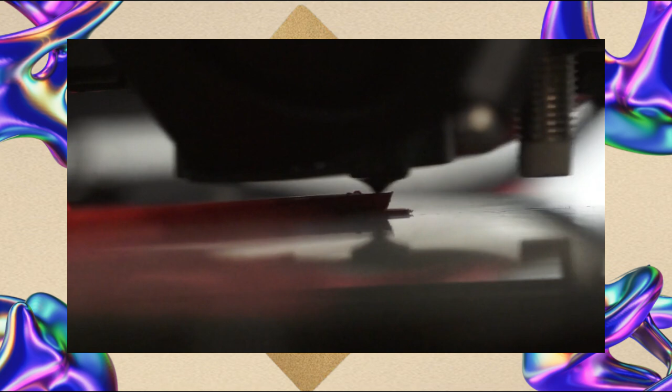This first project tackles that exact problem with a creative twist. We'll be using the power of 3D printing to design and build a custom adapter, turning that incompatible mirror into a perfect fit. Stay tuned to see this problem turn into a printed project.

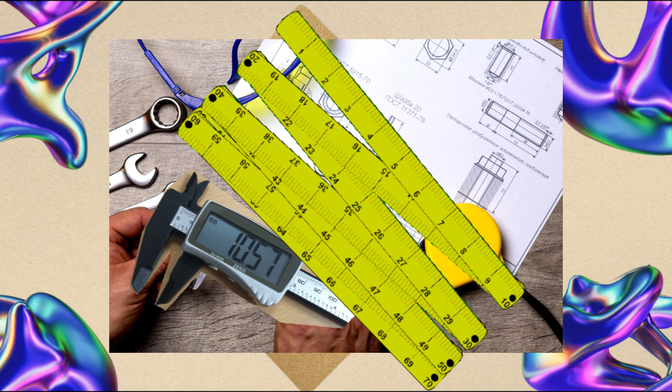Taking measurements. Before we jump into the exciting world of 3D design, let's tackle the first crucial step: measurements. We need the exact dimensions, so grab a ruler or some calipers. Digital ones offer great precision.

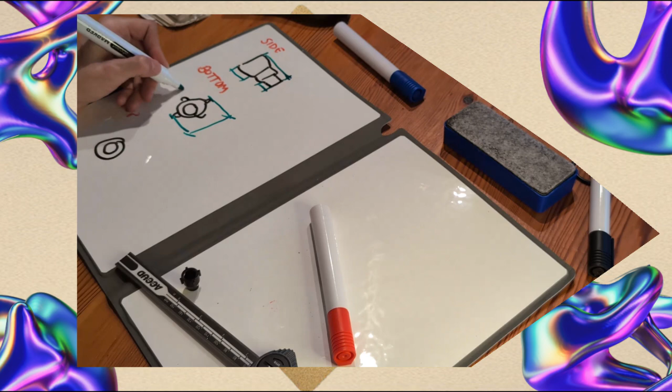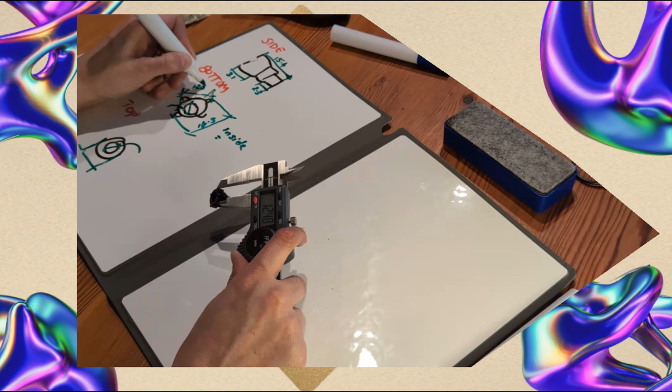We'll need the diameter of your handlebars at the mounting point, the diameter of the mounting hole on your mirror, and the dimensions of the connector. Don't forget to jot down any unique shapes or features on either piece, as these details might influence our design. With these measurements in hand, we'll be ready to create a 3D model that seamlessly connects your mirror to your handlebars.

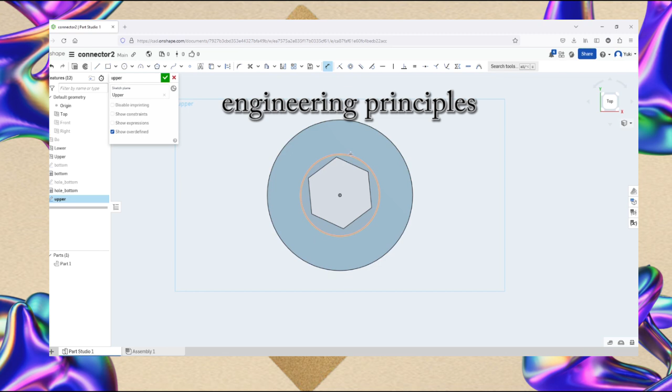Onshape is a parametric CAD, computer-aided design, program. This means you define your design using parameters, like the handlebar diameter, instead of manipulating individual points in 3D space. Why use Onshape? This focus on precise measurements and engineering principles might be more suitable. This makes it easier to make changes later on, and it's free to use.

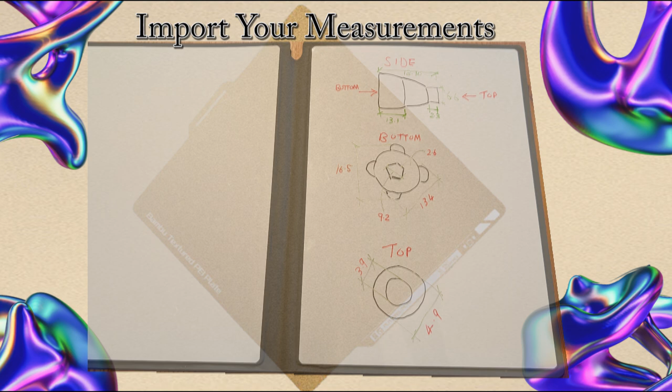All right, folks, it's time to unleash your inner designer and create a solution with Onshape. Here's a step-by-step guide. Step 1. Fire up Onshape and create a new document. This is your blank canvas where the magic happens. Step 2. Import your measurements. We finally get to use those meticulous measurements you took.

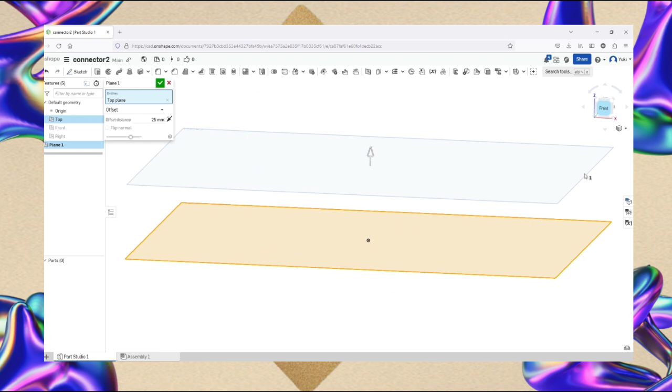However, before we jump in, Onshape needs a little preparation. Think of Onshape as a drafting board, but in 3D. To define your design, we need a flat surface to work on, kind of like a sheet of paper. These flat surfaces in Onshape are called planes. We'll need to create a sketch on one of these planes to begin.

The good news is, Onshape allows you to directly set the dimensions of your design elements within the sketch. This makes modifications super easy later on, which is why we'll be using parameters. Step 3. Set up the parameters. Instead of manually creating specific shapes with exact sizes, we'll define variables called parameters. These parameters will hold the actual measurement values you took, like for the handlebar connector diameter and the hole diameter.

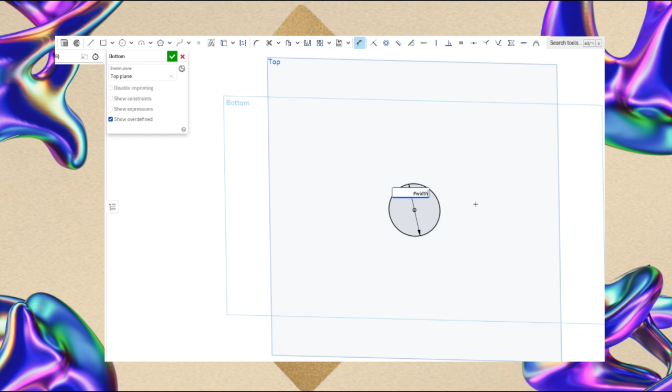Then, when you use these parameters within your sketch, Onshape automatically adjusts the size based on the values you entered. This way, if you want the connector to be slightly wider, you simply change the value in the #width parameter, and Onshape updates the entire model for you. No need to painstakingly redraw everything. So, let's get those parameters set up and ready to use.

Step 4. Building the connector. Let's get to work on the core component of your adapter, the connector. Here's a breakdown of the steps. Base for connector. Create a new sketch on the top plane and rename it to bottom or something unique to your design. Use the circle tool to draw a circle representing the base that fits into the adapter of your handlebars.

Remember those diameter measurements? This is where they come in. Once you're happy with the circle, use the Extrude tool and select the upper plane as the ending point. This will transform the circle into a solid cylinder, forming the base of the connector, creating the hole.

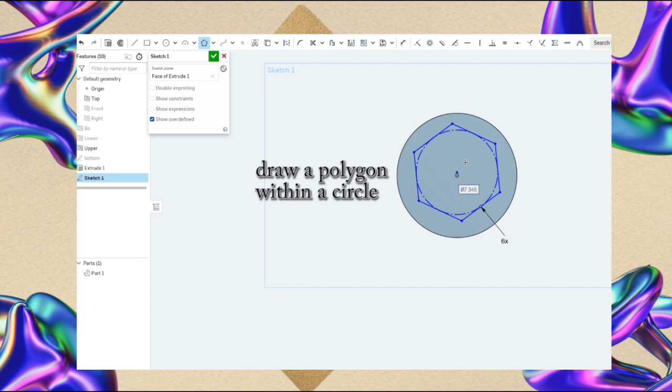Flip to the bottom face of the cylinder, the one we just extruded. Create a new sketch on this face using the Inscribed Polygon tool. This tool allows you to draw a polygon within a circle, defining the shape of the hole. The number of sides you choose will determine the shape, 6 for a hexagon. This will define the shape of the hole in the base so the screw will fit.

Once you have the desired polygon shape, use the Extrude tool again. This will remove the material within the polygon, creating a clean hole for the screw to pass through. Don't forget to rename the sketch for clarity. The middle of the connector.

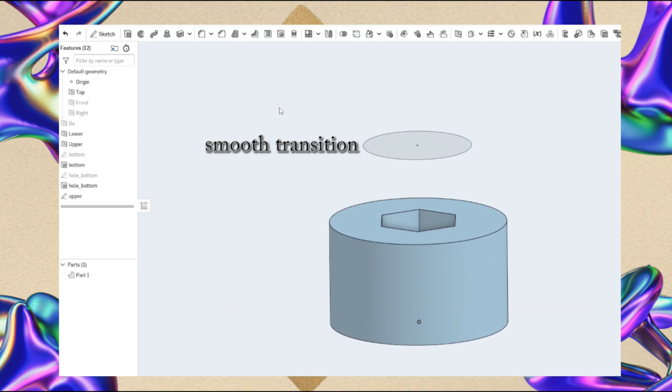Use the trusty circle tool once more to draw a circle representing the middle section of the connector. This circle will connect the top and bottom parts. Now comes the magic, the Loft tool. This powerful tool allows you to create a smooth transition between two or more profiles. In our case, the top and bottom circles.

Select the two relevant sketches and define the direction of the loft. Onshape will generate a smooth solid form connecting your base and middle section.

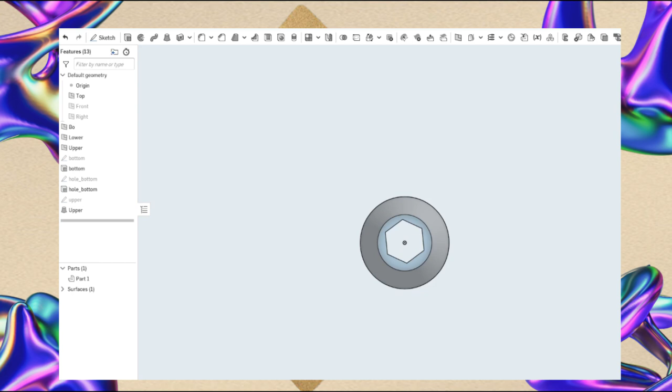The top of the connector. Create another sketch on a suitable plane. Use the circle tool once more to draw the outer circle representing the top of the connector. Draw another circle inside the first one, creating a donut-like shape. This inner circle will define the opening.

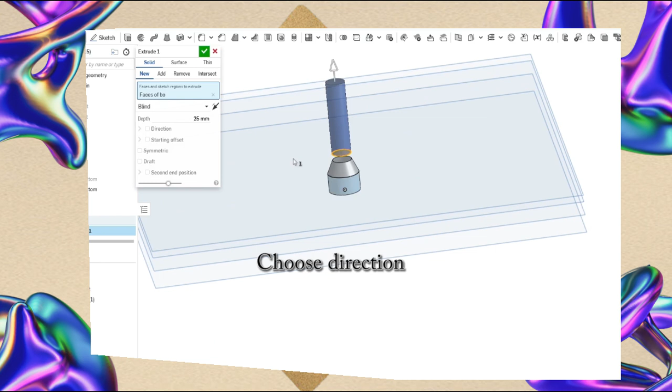Once you have the desired shape, use the Extrude tool to create a solid form from the sketch. Choose the appropriate direction to ensure it connects seamlessly with the middle section we created earlier. Flexibility is key. You can add parameters later. Learning about them while building the model can be a good way to experiment.

Here's how to incorporate parameters for easier future adjustments. Identify the dimensions you want to control, for example, the width of the connector. Head over to the Parameters section, create separate parameters for each dimension, and assign the actual measurement values you took

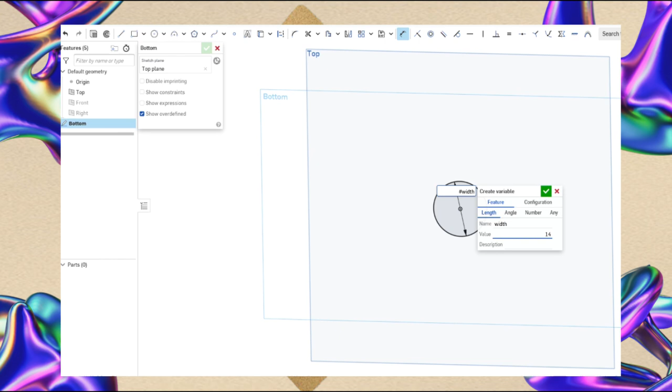earlier. The magic happens with a symbol, the hashtag. By using the hashtag symbol with the name of the parameter, example hashtag width, you can reference it within your sketch dimensions.

So go back to your section representing the connector base. Replace the fixed size you entered earlier with a reference to the corresponding parameter. This ensures a perfect fit based on your actual measurement. This gives you ultimate flexibility in refining your design.

Building the fin to ensure snug fit. The fin is a crucial element for a secure fit. Create a new sketch on a suitable plane. Consider the placement of the fin and choose a plane that aligns with your design goals.

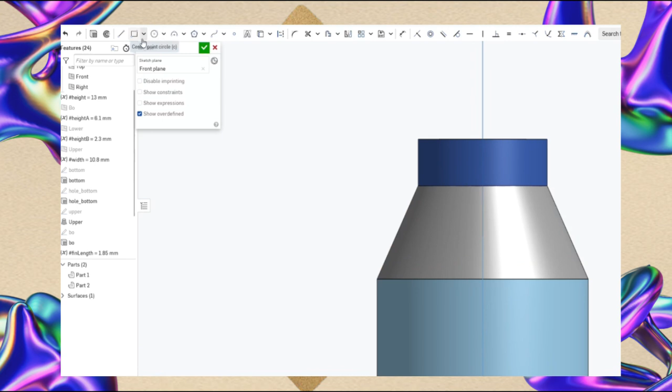Use the trusty rectangle tool to define the basic shape of the fin. Now let's define the exact size of the fin. Add dimensions for both the height and width of the rectangle. But instead of fixed values, this time assign a parameter for each dimension. This allows you to easily adjust them later if needed.

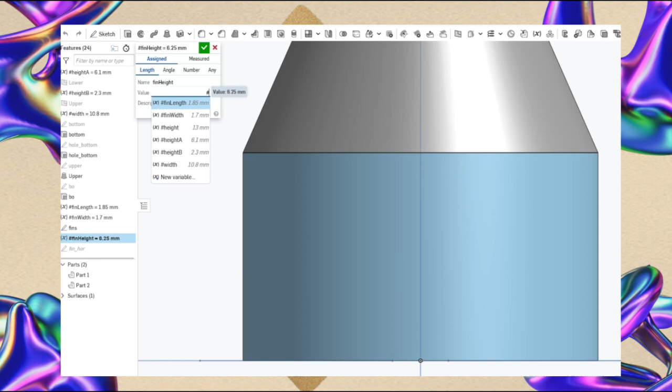Use the Extrude tool to create a solid form from the sketch. Set the depth of the extrusion to match your desired fin size. To ensure the fin sits correctly, you might need to adjust the offset value in the extrude settings. This essentially moves the starting point of the extrusion left or right from the chosen plane.

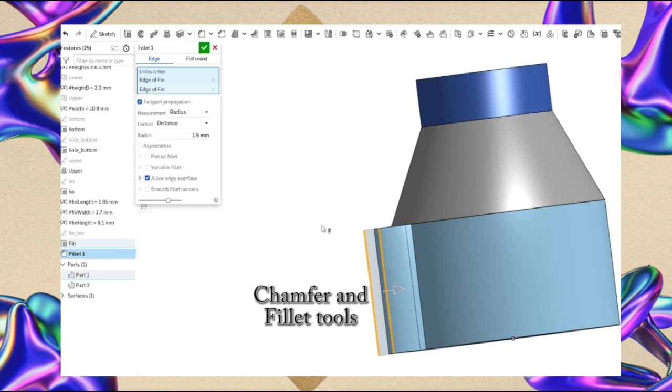Finally, use the chamfer and fillet tools to refine the edges and corners of the fins for a smoother and more finished look.

Adding multiple fins. The beauty of 3D printing is the ability to customize for functionality. In this case, let's add multiple fins to your adapter for an extra secure fit.

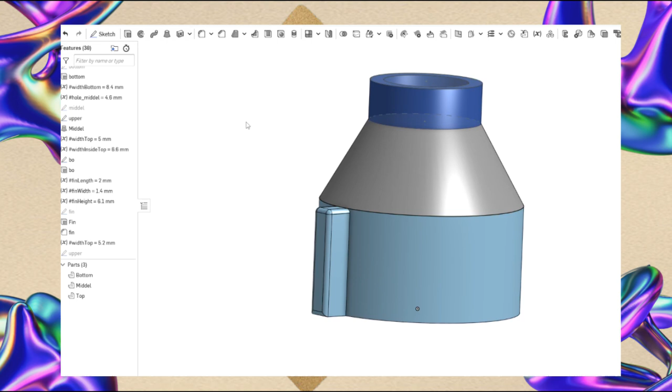Onshape offers a fantastic tool called Circular Pattern that allows you to easily replicate features around a central axis. This is perfect for creating our multiple fins. We need to tell Onshape which element to pattern, to copy, and around what axis it should rotate.

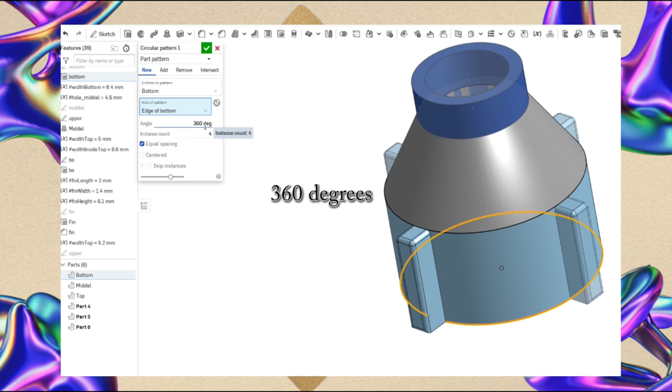We want the fins to completely encircle the base, so set the angle to 360 degrees. This tells Onshape to rotate the copied fin a full circle. For the number of fins, set the instance count to 4 and equal spacing. This ensures each fin is evenly distributed around the base.

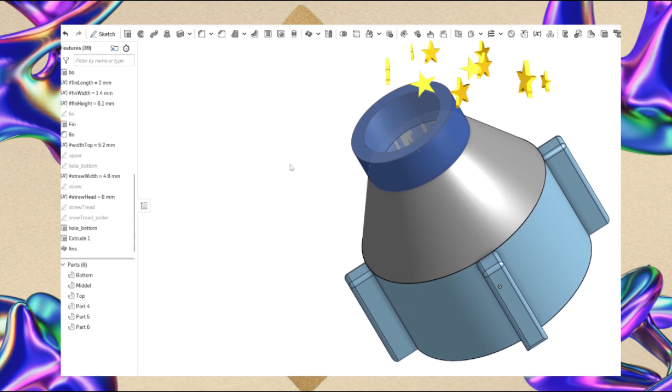Onshape automatically creates 4 copies of your fin, perfectly spaced around the bottom plane of your connector. You've successfully added multiple fins for a secure and stable fit. Remember to give your pattern a descriptive name for better organization.

Refine and finalize. We've conquered the design stage. Now, let's bring your creation to life.

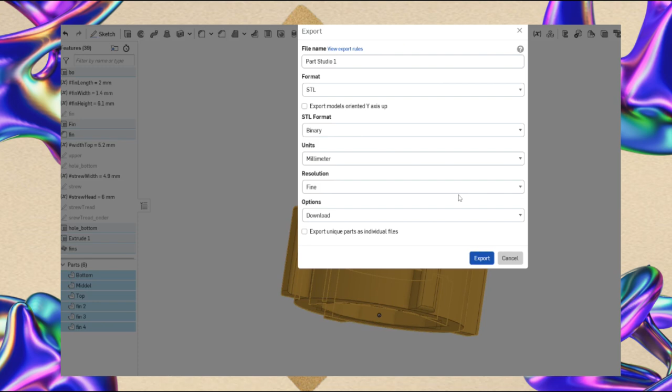Once you're happy, Onshape lets you export your design in various 3D printing formats, like STL or OBJ. This is a 3D print format and can now be read by your 3D printer. Upload your file and choose your desired printing material. Remember, consider strength and weather resistance for a bike part, so I use PETG.

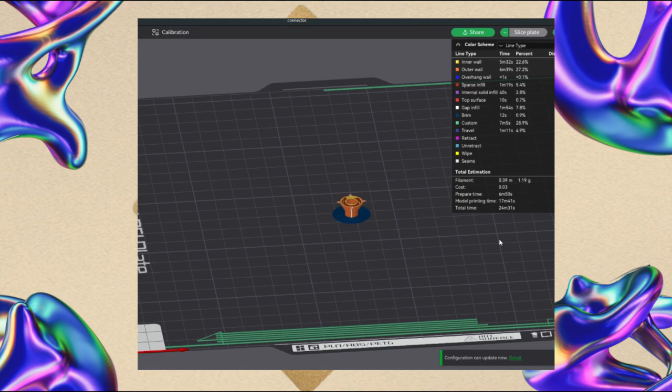Open Bambu Studio. This software slices your 3D model into thin layers, essentially providing instructions for your 3D printer. Import your exported model from Onshape into Bambu Studio.

Once you're satisfied with your settings, it's time to send the sliced model to your 3D printer. When you're ready, confirm the print job and watch your custom connector come to life.

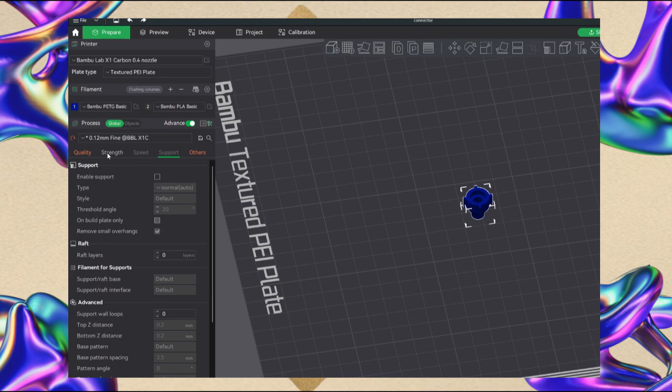Don't worry if your design isn't perfect on the first try. It's easy to make adjustments in Onshape. This is exactly what I had to deal with to achieve a perfect fit, whether it's that those meticulous measurements are slightly off, or it's just finer details that need adjustment.

As you build, you might discover a better way to achieve a specific function. You can adjust the parameters, dimensions, or even the sketch itself to achieve the desired change. This benefit allows you to iterate and refine your design until it's perfect.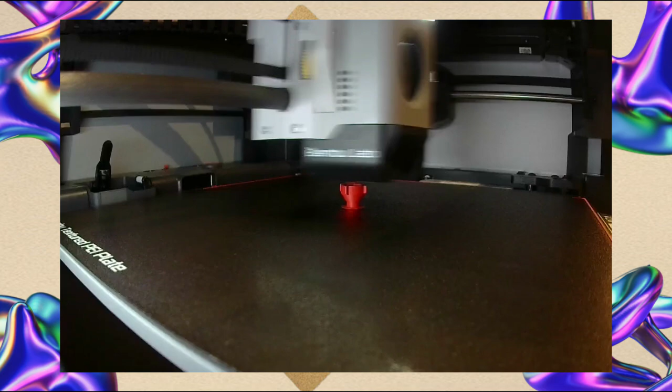Lessons learned: a quick test print is your best friend. This allows you to compare the printed dimensions with your original design. Aim for a difference of around 0.2 mm, with 0.1 mm being ideal.

Calibrating your printer: nozzle height. This plays a crucial role. Going too low can lead to printing issues, so keep it above 0.06 mm.

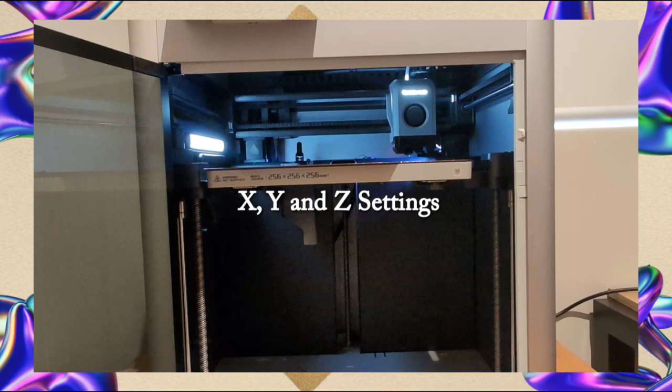X, Y, and Z settings. Fine-tuning these settings can significantly improve overall dimensional accuracy.

Infill refers to the hidden world inside your 3D print. It's like the skeleton that gives your creation its strength and weight. More infill, more strength, but this also uses more filament and increases printing time.

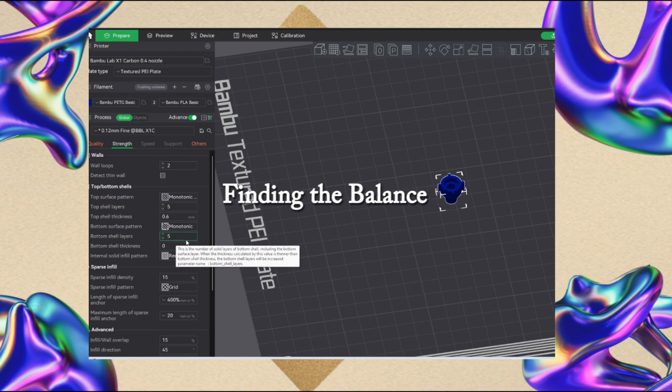For my connector, I had to increase the infill. Finding the balance: a moderate infill, around 50%, should be a good starting point. Remember, you can always experiment with infill settings later to find the perfect balance between strength and efficiency for your specific needs.

PLA does not like heat or constant strain, and because it's for a bike part, I decided to print it in PETG, which has better strength and weather resistance.

Voila! Your custom-made solution should have your mirror sitting proudly and safely on your handlebars.

Now, the moment of truth. It's time to test the fixed mirror and hit the road with confidence. The conclusion.

That's it for this project. We've conquered measurements, unleashed your inner designer, and have seen this creation come to life.